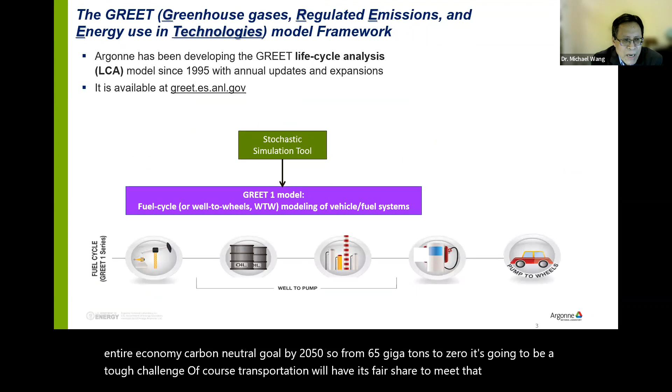So from 6.5 gigatons to zero, it's going to be a tough challenge. Of course, transportation will have its fair share to meet that challenge. Michael mentioned our efforts to develop the GREET model. In fact, we released the first GREET version in 1995. Since then, we have annual updates and expansion. The model is available at the GREET website.

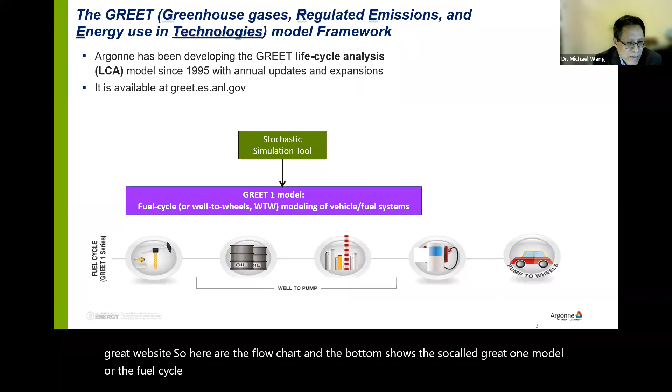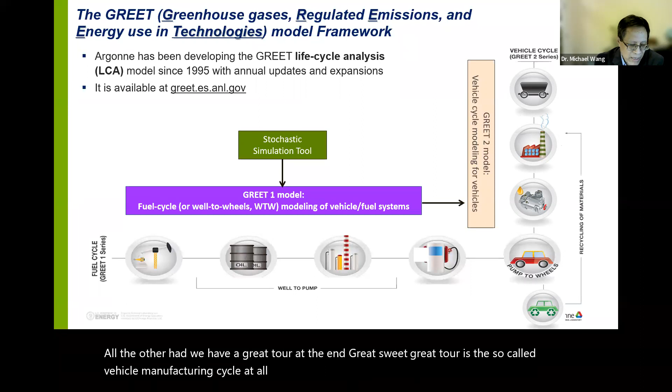So here, the flow chart at the bottom shows the so-called GREET 1 model, or the fuel cycle model, or sometimes you hear the WTW modeling. So this is in GREET 1. On the other hand, we have GREET 2 in the GREET suite. GREET 2 is the so-called vehicle manufacturing cycle. And I'll touch on both GREET 1 and GREET 2 this evening.

This is a chart to summarize our GREET user base. So as of now, we have over 50,000 registered users globally. And you see some major users with the company logos in the chart. And many OEMs are indeed intensive GREET users. For example, these 3 OEMs and some international OEMs use GREET.

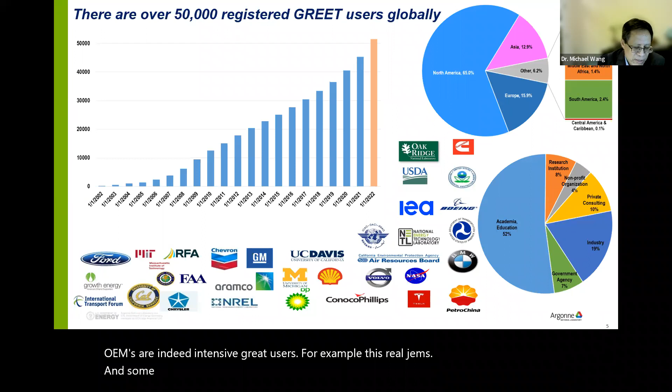The model has been used by different agencies for regulation development and for technology evaluation. For example, California Air Resources Board uses GREET for its own low carbon fuel standard compliance. EPA uses GREET for the renewable fuel standard and for tailpipe greenhouse gas emission standards. And NHTSA has used GREET for CAFE standards development.

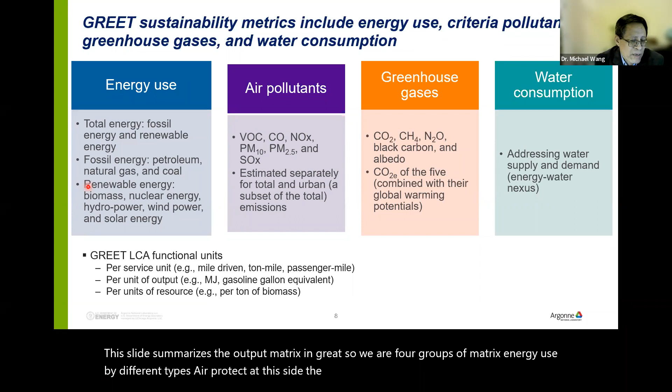This slide summarizes the output metrics in GREET. So we have 4 groups of metrics: energy use by different types; air pollutants, and these are the criteria air pollutants regulated by EPA; greenhouse gases, where we have the conventional greenhouse gases, CO2, CH4, and N2O, and we have some short-lived greenhouse gas emissions too. And finally, we have water consumption.

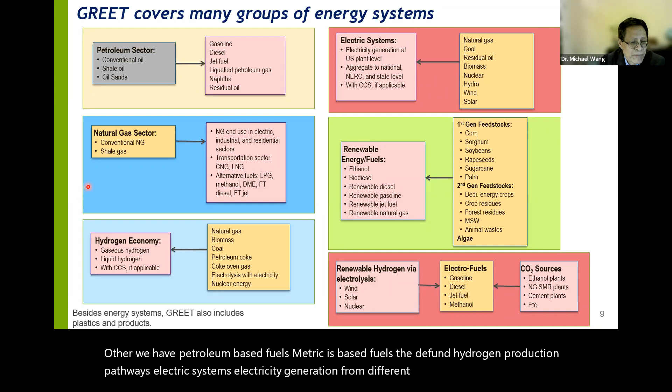This slide summarizes the so-called fuel production pathways included in GREET. So this is what's covered in the GREET 1 model. And we have petroleum-based fuels, natural gas-based fuels, different hydrogen production pathways, electric systems, electricity generation from different fuels and power plant types. And we cover biofuels and renewable fuels extensively with different feedstocks and different conversion technologies.

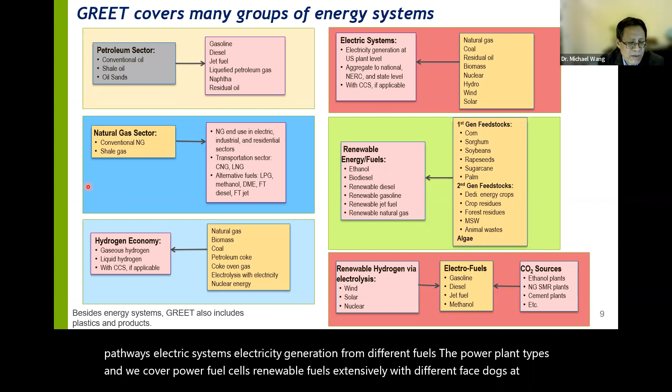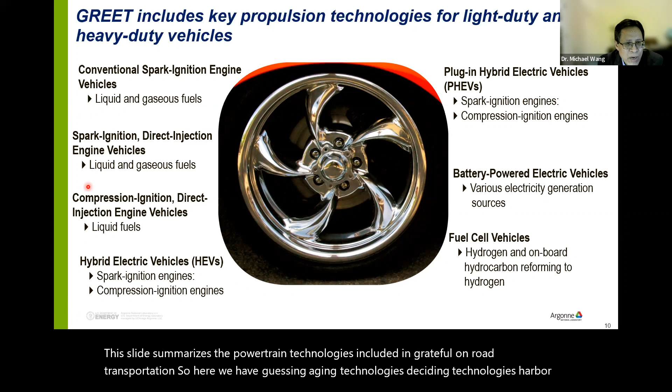And in the last 2 years, we added the so-called electrofuels, which are fuels produced from CO2 sources with renewable hydrogen from renewable power. This slide summarizes the powertrain technologies included in GREET for on-road transportation. So here we have gasoline engine technologies, diesel engine technologies, hybrid electric vehicles, plug-in hybrid electric vehicles, battery EVs, and fuel cell vehicles.

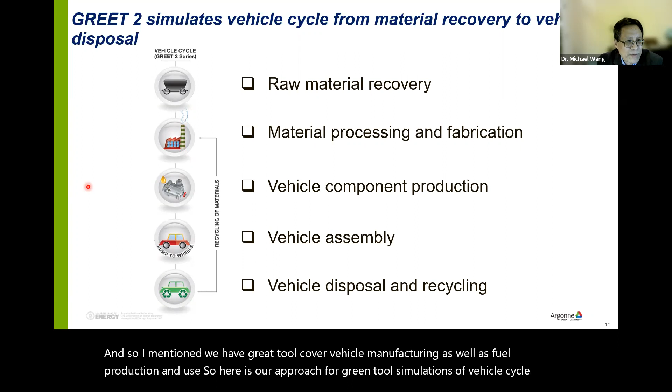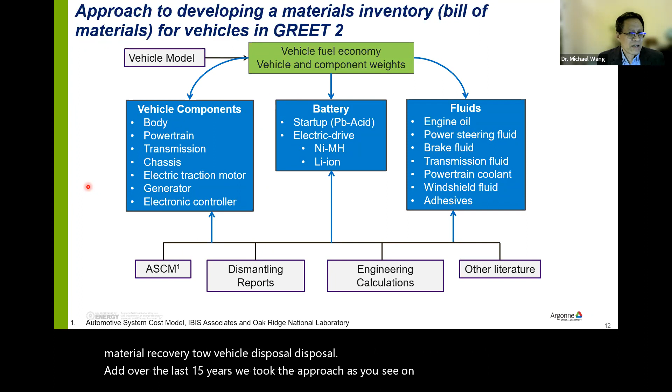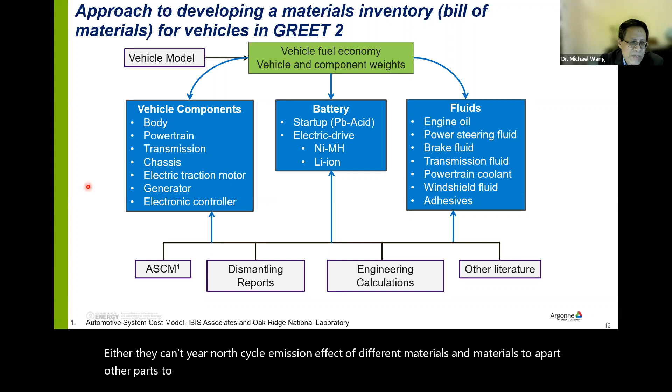And so I mentioned we have a GREET tool to cover vehicle manufacturing as well as fuel production and use. So here is our approach for GREET simulations of the vehicle cycle, from material recovery to vehicle disposal. Over the last 15 years, we took the approach you see on this slide. Basically, we break the whole vehicle into the major vehicle components, such as body, powertrain, transmission, and so on. Then we get the material composition of each component. And then we look at the life cycle emission effect of different materials, materials to parts, and parts to vehicles. So this is our GREET approach.

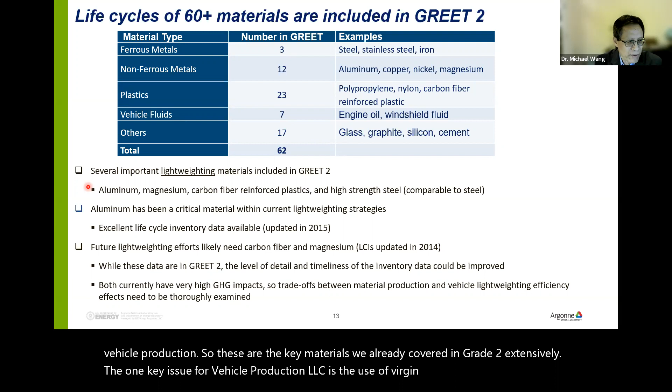And so far, we covered over 60 materials for vehicle production. We have steel, aluminum, rubber, different types of plastics, and different metals used in vehicle production. So these are the key materials we already covered in GREET 2 extensively. And one key issue for vehicle production LCA is that the use of virgin versus recycled materials can significantly affect the vehicle cycle greenhouse gas emissions, or environmental performance in general.

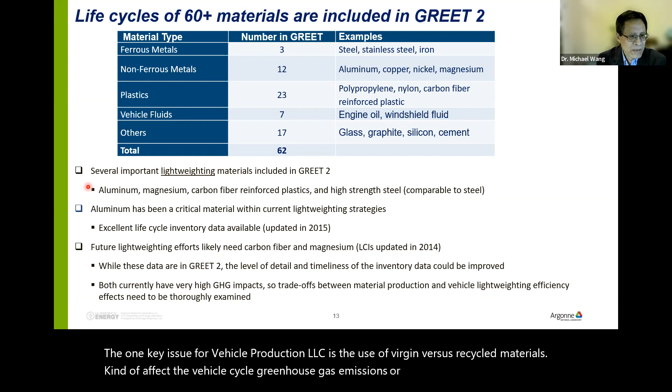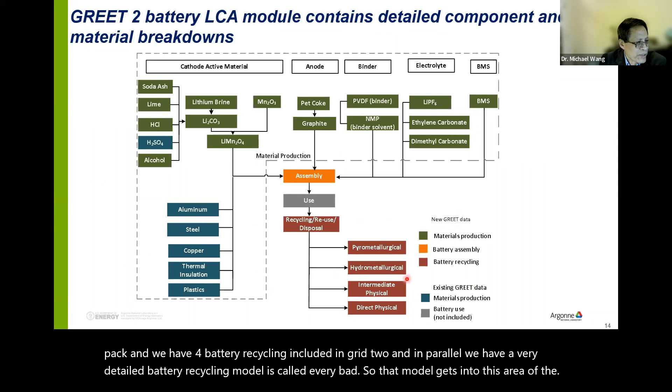And we have battery recycling included in GREET 2. And in parallel, we have a very detailed battery recycling model. It's called EverBatt. So that model gets into this area of the battery LCA significantly.

So for baseline technologies and systems, we rely on several government agencies' databases, such as those from Energy Information Administration, from EPA, and from USGS, and of course, some USDA databases for biofuels.

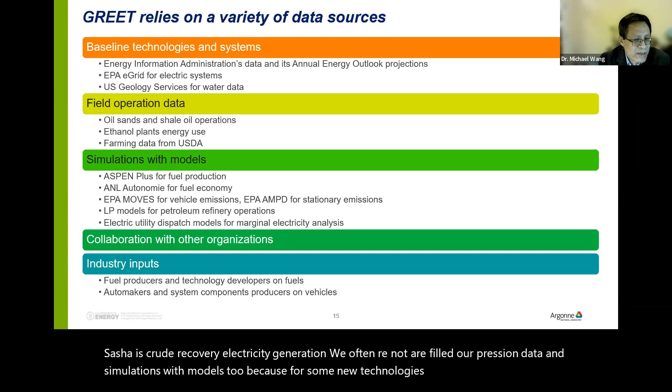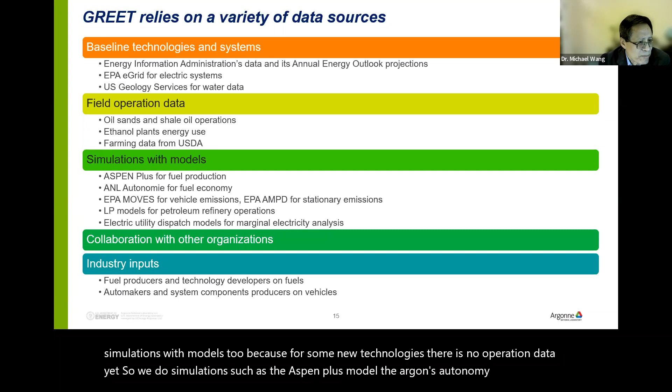And for the specific technologies we evaluate, such as crude recovery, electricity generation, we often rely on field operation data and simulations with models too, because for some new technologies, there is no operation data yet. So we do simulations such as the Aspen Plus model, Argonne's Autonomie model, EPA's MOVES model to generate the needed energy use and emissions for the activities in GREET.

And we have had a lot of collaborations with other organizations and with companies. So these are significant data sources for GREET too. And so now I take you one step further. So what do we include in life cycle analysis?

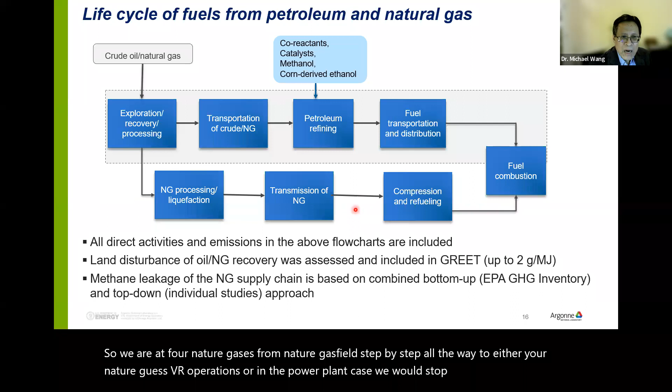So this flowchart shows you the system boundary of LCA for crude and natural gas-based fuel cycles. So in this case, crude from oil field all the way to fuel combustion and vehicle. But for natural gas, it is from natural gas field step by step all the way to either natural gas vehicle operations, or in the power plant case, we would stop here for power generation in natural gas-fired power plant.

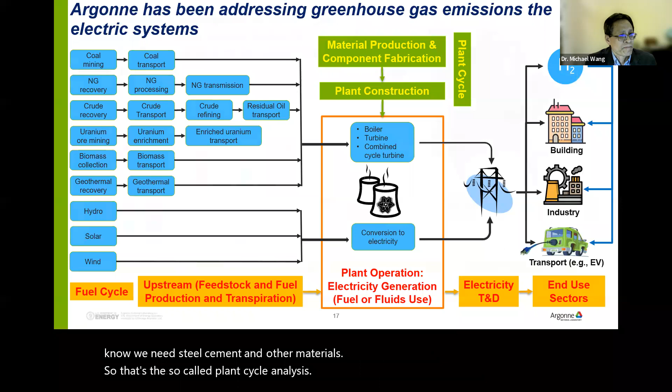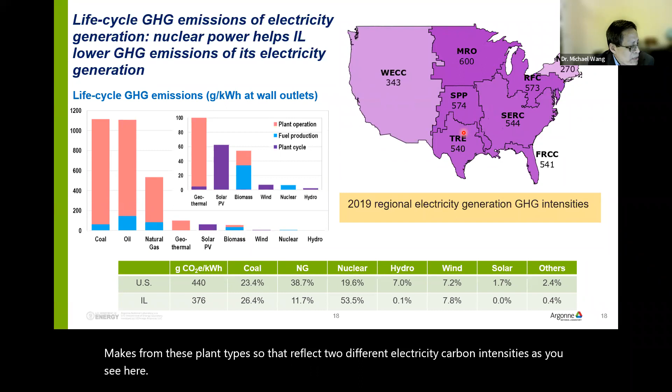And furthermore, if we look at Illinois versus US, we see the Illinois electricity has somewhat lower carbon intensity than the US average electricity. That's because we have a significantly large nuclear power share in our generation mix. As you can see, the nuclear power carbon intensity is very low, and we do include uranium enrichment, transportation, and those upstream stages.

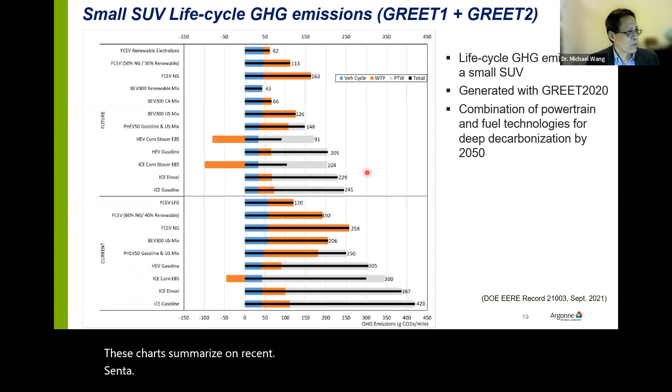These charts summarize a recent publication we developed for the Department of Energy in the so-called DOE EERE record. So here, we have the so-called current and future scenarios. Current is around 2020, future is around 2040 to 2050. As we all know, the technologies will advance over time, and our whole economy will go through decarbonization. And so those effects reflect from the current greenhouse gas emission performance to the future greenhouse gas emission performance.

And then within each time frame, if you look at here, we have different powertrain systems: gasoline vehicle, diesel vehicle, hybrid electric vehicles, plug-in hybrid, battery electric vehicles with 300-mile electric range, fuel cell vehicles with conventional hydrogen production or renewable hydrogen production.

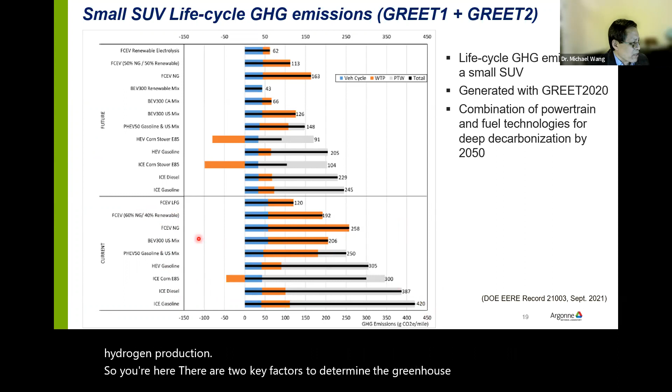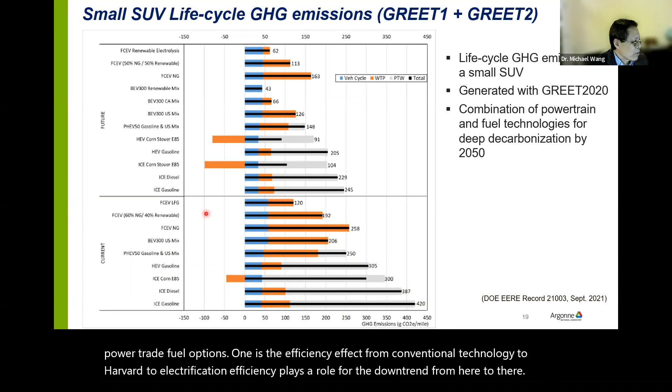So here, there are two key factors to determine the greenhouse gas emissions of these powertrain fuel options. One is the efficiency effect. From conventional technology to hybrid to electrification, efficiency plays a role for the downtrend from here to there. But also, if we look at a specific powertrain technology, the way to produce fuel plays an important role too. So here, hydrogen from different sources can have significant effect on the LCA result of greenhouse gas emissions.

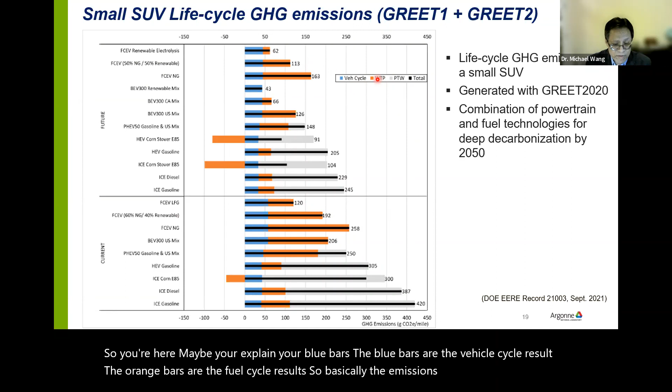So here, let me explain the blue bars. The blue bars are the vehicle cycle result. The orange bars are the fuel cycle results, so basically the emissions associated with the fuel production. This is the vehicle production. The gray bars are the vehicle operation-related emissions. So for electric cars, we know there are no emissions from vehicle operation. So your blue bars are vehicle cycle result.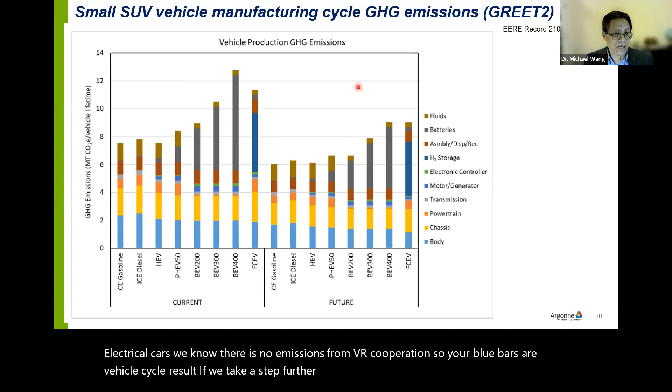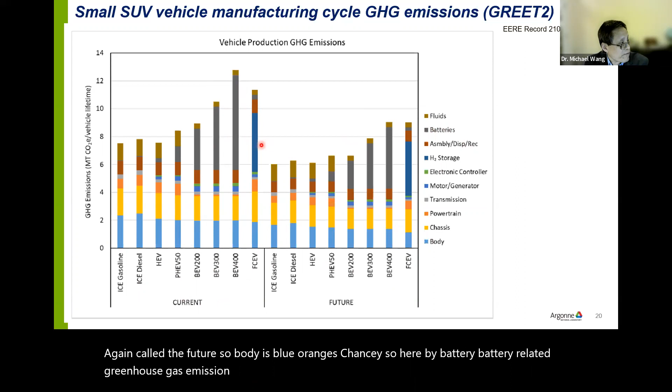If we take a step further on the vehicle cycle result, let's see where the emissions are from for the vehicle cycle result. So here, body, this is the car itself for different powertrain systems, as you see here. Again, current and future. So body is blue, orange is chassis. So here, battery-related greenhouse gas emission contributions here. The fuel cell and hydrogen storage tank contribution is here.

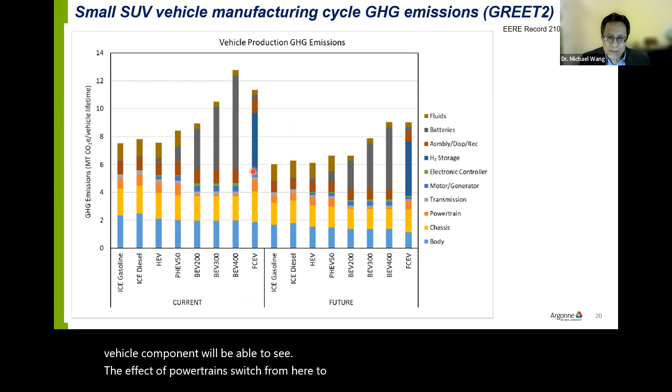So now when we break down the vehicle cycle results to different vehicle components, we'll be able to see the effect of powertrain switch from here to there. Where do we see the switch in greenhouse gas emission burdens for a whole car? So that's what we can generate from GREET simulations. So yeah, those are some results for the US.

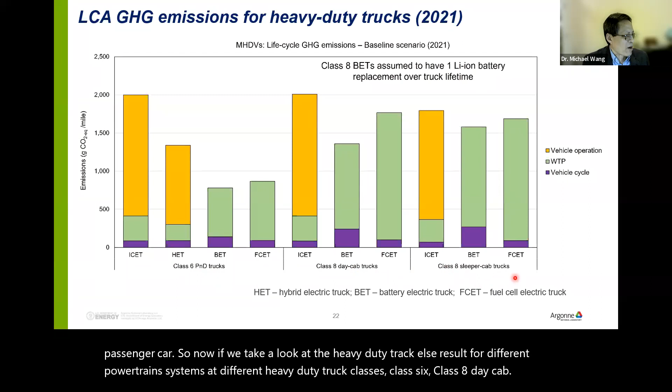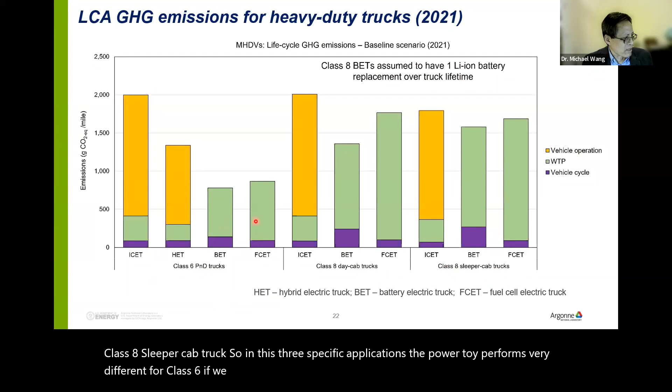So that's the result for passenger cars and SUVs. The US result was for SUV, the global result was for passenger car. So now if we take a look at the heavy-duty truck LCA result for different powertrain systems and different heavy-duty truck classes, Class 6, Class 8 day cab, Class 8 sleeper cab truck. In these three specific applications, the powertrain performance is very different. For Class 6, if we electrify, we see significant greenhouse gas reductions. But for Class 8, the benefit is not that significant relative to the diesel trucks.

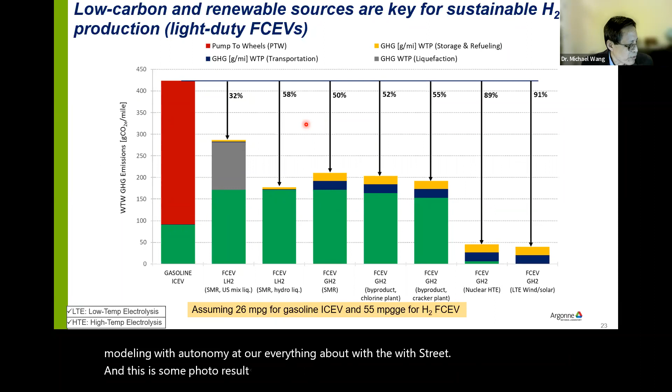So that's a key factor we found out through our very detailed vehicle modeling with Autonomie and our LCA modeling with GREET. And this is some further result for hydrogen fuel cell. So as I mentioned, for hydrogen fuel cell, the way to produce hydrogen has significant effect. So this is the liquid hydrogen from natural gas steam methane reforming. This is how we see hydrogen produced now.

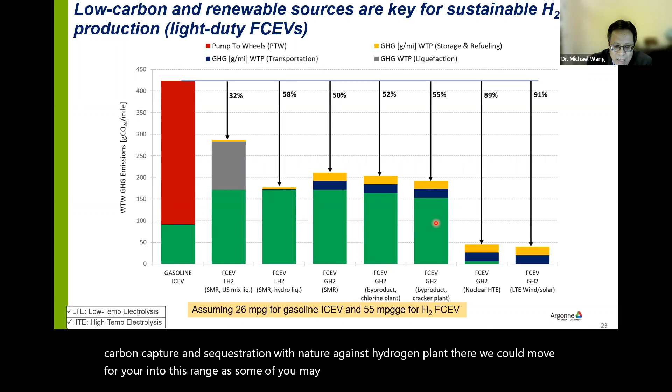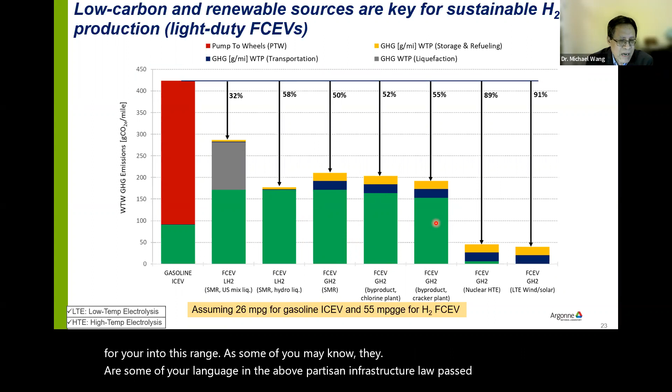But if we can move to the so-called green hydrogen production, in this case hydrogen from renewable power, we have significant reductions. Or if we have the so-called blue hydrogen, that's carbon capture and sequestration with a natural gas hydrogen plant, then we could move into this range. As some of you may know, there is some language in the bipartisan infrastructure law passed last summer. There are some specific hydrogen greenhouse gas standards proposed in the law. And at this moment, DOE is using GREET to develop the standards for different hydrogen production pathways.

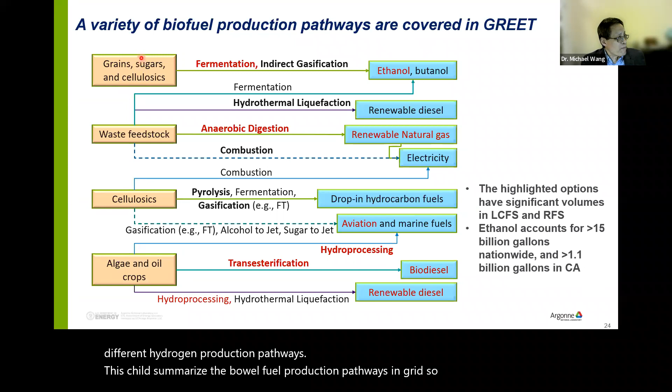This chart summarizes the biofuel production pathways in GREET. So we have many biomass feedstocks on the left, many conversion technologies in the middle, and we result in different biofuels on the right. So these are various combinations of biofuel productions. What are highlighted in red in this chart are the significant biofuel productions as we see now in the US. For example, corn ethanol, the US produces close to 16 billion gallons a year now.

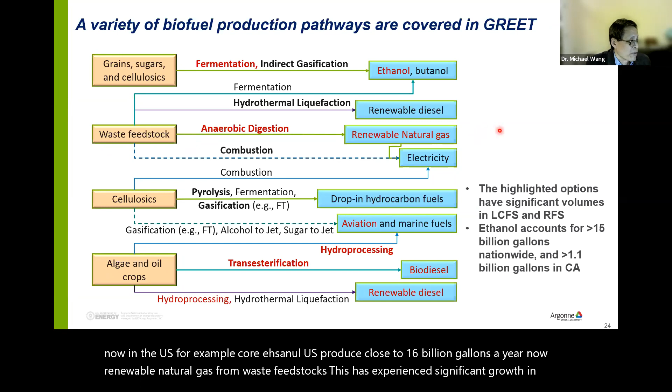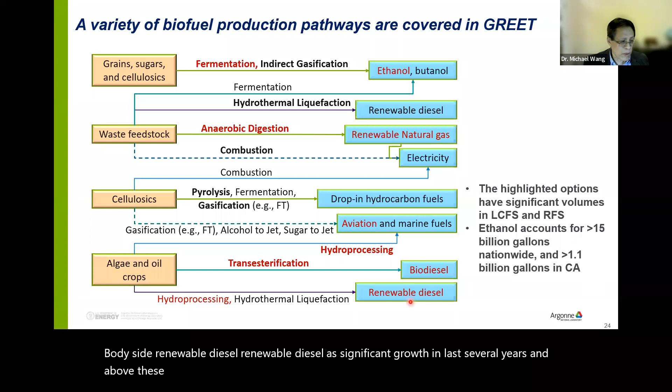Renewable natural gas from waste feedstocks has experienced significant growth in the last 5 years, both nationwide and in California. Biodiesel and renewable diesel have seen significant growth in the last several years, but biodiesel production has stabilized near 2 billion gallons a year. So these are our significant biofuel supplies now in the US.

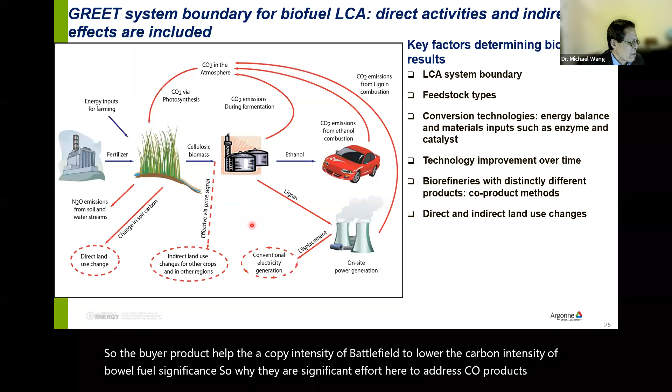Two key factors affect biofuel LCA results. First is land use change, as you see here, we include it in GREET. The other is the byproduct from a biofuel plant together with biofuels. For example, we produce animal feed in an ethanol plant, and we have soy meal from soybean together with biodiesel and renewable diesel. So the byproducts help lower the carbon intensity of biofuel significantly. While there are significant efforts here to address co-products in LCA, in the last almost 14 years, the controversial issue has been land use change, and I'll touch on that later.

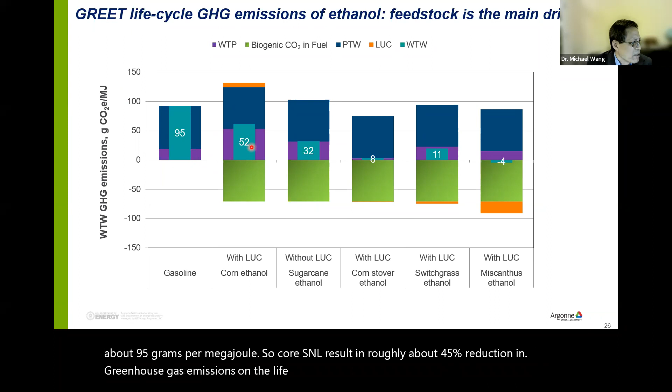Here is a high-level summary of our biofuel results. Corn ethanol, based on our most recent analysis, has a carbon intensity of 52 grams per megajoule versus our gasoline at about 95 grams per megajoule. So corn ethanol results in roughly about 45% reduction in greenhouse gas emissions on a life cycle basis. If we move to so-called second generation biofuels, as we see in the last three bars here, we have much lower carbon intensity for ethanol.

Some facts for Illinois: we are number 3 in the nation for biofuel production. The number 1 state is Argonne... actually Iowa, and number 2 is Nebraska. So we are a significant biofuel producing state. As I mentioned, we conclude that corn ethanol now achieves about 44% greenhouse gas reductions versus petroleum gasoline, and this is from a GREET simulation.

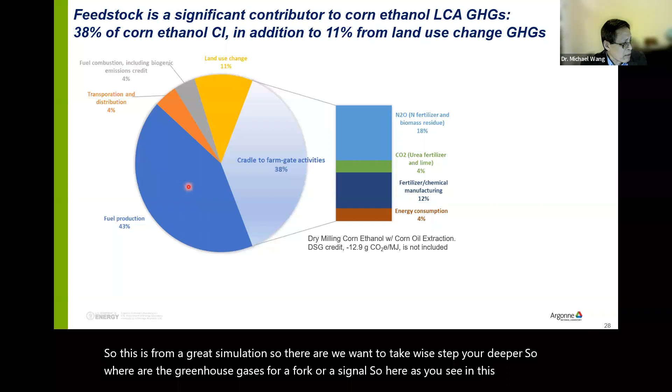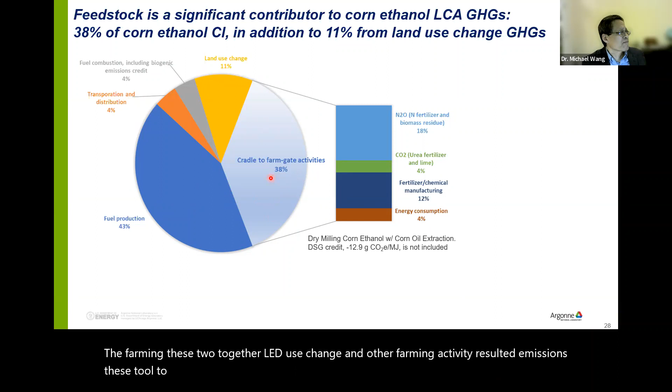Now we want to take one step deeper. Where are the greenhouse gases for corn ethanol coming from? As you see in this pie chart, the ethanol plant accounts for about 43% of the total corn ethanol greenhouse gases. The farming activities, together with land use change, account for about half of the corn ethanol greenhouse gas emissions. So feedstock is a significant stage for our corn ethanol carbon intensity.

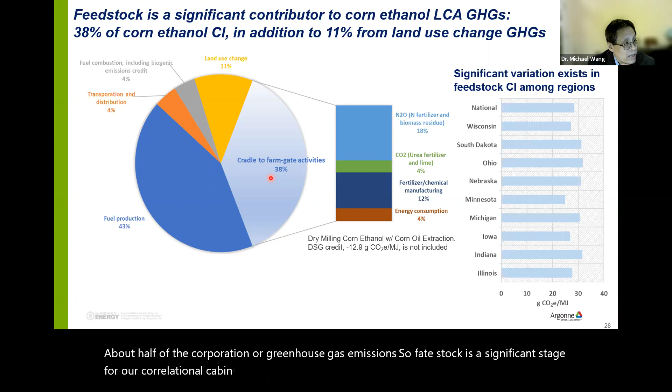If we look at Midwest states, we know the yield of corn is different in different states because of climate and soil conditions, and LCA results reflect that. So here are the major 9 corn producing states and the carbon intensity of corn fed into ethanol production.

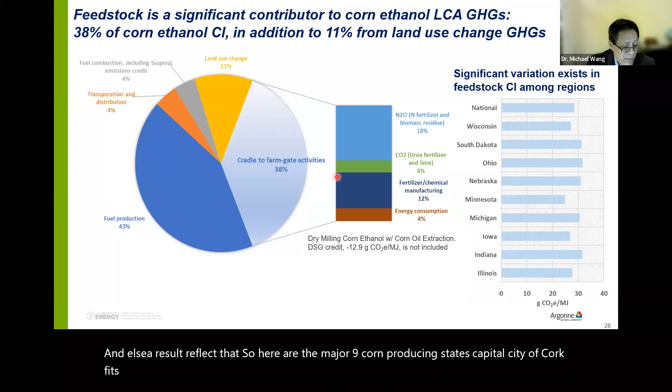So you alluded to our recent study on corn ethanol. Last year we published a paper documenting our examination of the US corn ethanol industry from 2005 all the way to 2019. 2005 is when the first Renewable Fuel Standard was put in place, and in 2010 we have RFS2 in place. So our biofuel policies have had a significant effect on biofuel volume, getting us now to close to 20 billion gallons of biofuels, with corn ethanol accounting for up to 16 billion gallons.

We wanted to see whether there's a trend in the carbon intensity of corn ethanol. So we used USDA statistical data for farming and industry surveys for corn ethanol plant performance over 15 years. We conclude that corn ethanol CIs have decreased over the last 15 years by 23%, from two sources: the corn ethanol plant CI reduction shows about 30% - the plant itself reduced its carbon intensity by 30% - and the corn farms have reduced carbon intensity by 15%. Together these make the industry reduce its carbon intensity by 23%. That's why we now show corn ethanol in 2019 reduced greenhouse gas emissions roughly by 45% relative to petroleum gasoline.

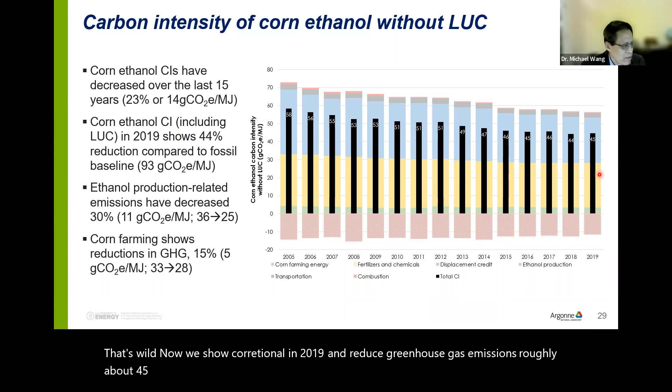And many of us know where they are. Some transportation sectors are hard to electrify - the so-called hard-to-electrify subsectors, including aviation, long-haul trucks, and ocean-going vessels. These are the sectors that will be hard to electrify, so liquid fuels are uniquely positioned to continue being the energy source for those sectors. So how are we going to decarbonize those subsectors?

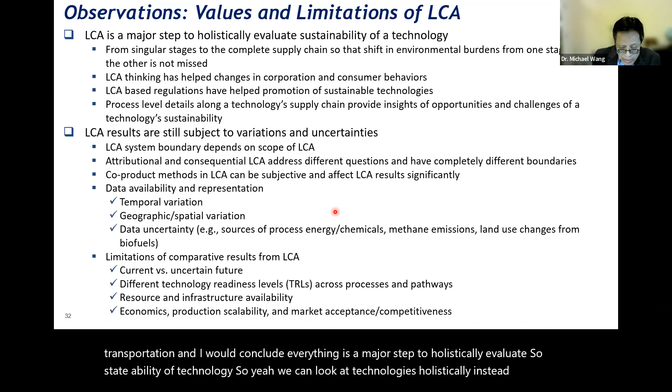I would conclude LCA is a major step to holistically evaluate the sustainability of technology. So we can look at technologies holistically instead of, back many years ago, only looking at tailpipe emissions for vehicles. Now we look at the whole fuel cycle, the vehicle cycle, and vehicle operation.

The LCA thinking has helped change corporate and consumer behaviors. Corporations now have to disclose the so-called scope 1 to 3 emissions, which are supply chain emissions, or in different terms, LCA emissions. LCA-based regulations have helped promote sustainable technologies.

We see that for biofuels from our retrospective analysis of US corn ethanol. The process level details give us insight into the opportunities and challenges of technology sustainability. But LCA results are still subject to variations and uncertainties.

System boundaries depend on the scope of LCA. You saw our system boundaries for petroleum fuels, natural gas fuels, electricity, and biofuels. And even though we think our system boundary is comprehensive, there are still people asking us to expand the system boundaries for LCA. I mentioned the co-product effect results significantly matter, and data availability and representativeness is a key issue for LCA results.

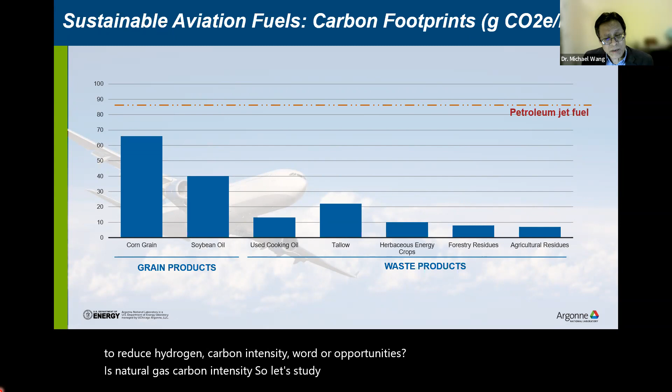And for GEVO, what we did was look at the first part, corn grain-based isobutanol, and isobutanol to jet fuel. So what we did was look at their technology and where the opportunities are, where hydrogen is used, where natural gas is used, what are the opportunities to reduce hydrogen carbon intensity, where there are opportunities to reduce natural gas carbon intensity. That's a study we did last year. We had a draft paper submitted to a journal, and it's currently under review.

Okay, thank you. Anyone else have any other questions here?

I had a question, Mike. For those who didn't see the note we put in the chat, if you have questions, please put them in the chat and we'll moderate them. Michael, when we had another group from the Iowa Corn Growers Association, they presented that ethanol can actually be carbon neutral because when they grow the corn, it pulls CO2 out of the air. Did you factor in the CO2 absorbed in the growing process into the cradle to farm gate activities?

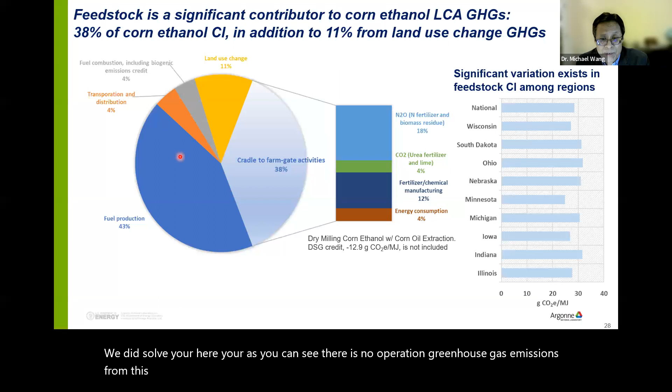Yeah, we did. As you can see, there are no vehicle operation greenhouse gas emissions from this part for ethanol. That's because the carbon in ethanol is carbon from the air, the so-called carbon neutrality approach. So that's built in.

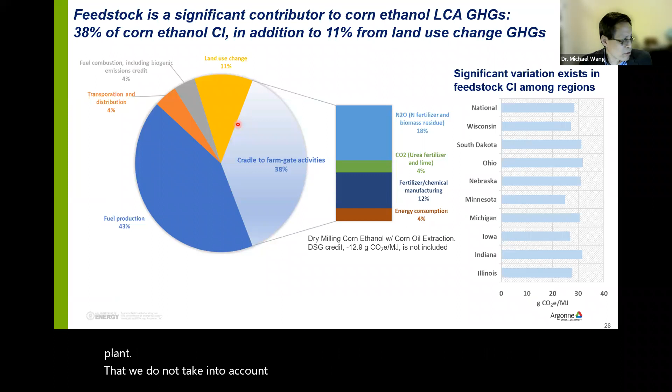The corn ethanol plant fermentation process produces significant CO2 emissions, as we know, because beer distillation produces CO2 just like ethanol plants. We do not take into account the fermentation CO2 in this part, because that CO2 is from the CO2 in the air during the corn plant's growth. So that's carbon neutrality, and even with that, we still see significant greenhouse gas emissions.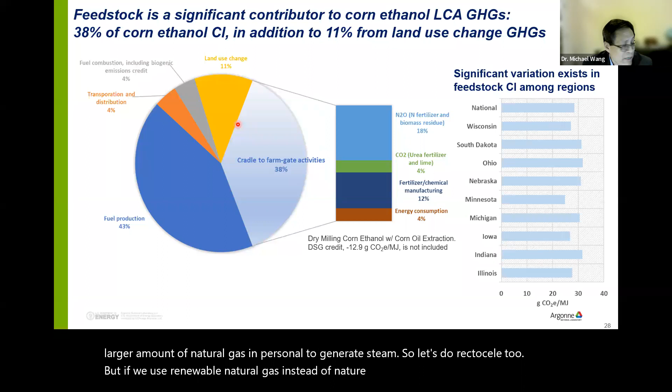Why? Because we use a larger amount of natural gas in ethanol plants to generate steam, so that's direct CO2. But if we use renewable natural gas instead of fossil natural gas, we can remove a large amount of the ethanol plant's CO2.

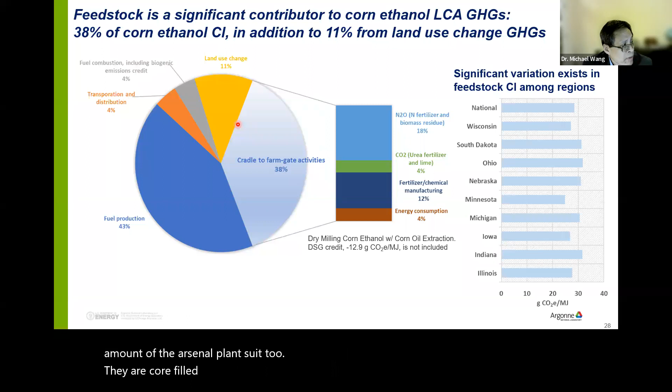The cornfield emissions—there is some data showing that soil organic carbon content has increased over the last 30 to 40 years in corn farms. So there's long-term soil organic carbon data showing increased soil carbon content. That's in a way carbon sequestration from the air to plant roots, and it adds up in the soil.

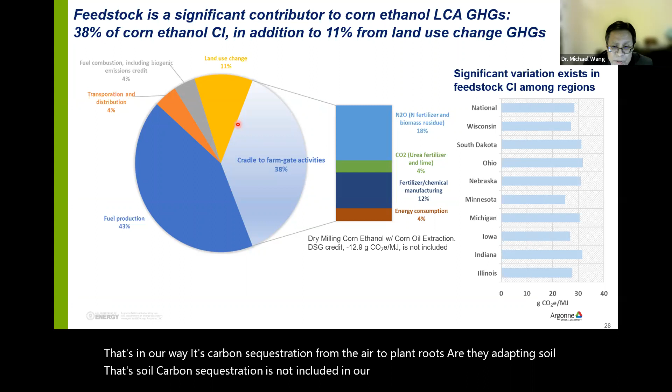That soil carbon sequestration is not included in our analysis, because we're still doing a lot of analysis to see whether we have reliable data on SOC. Plus, EPA and California do not take into account SOC changes, so because of that, we do not take it into account.

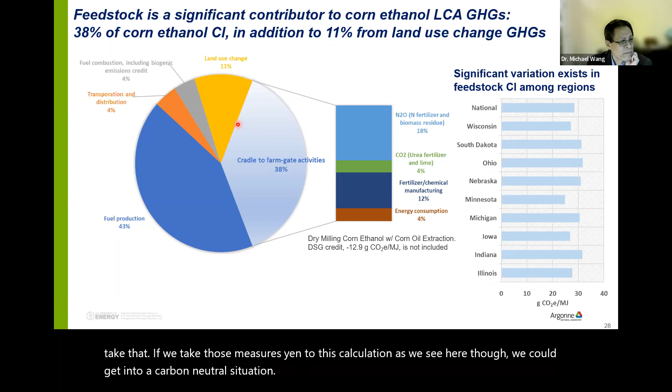If we take those measures into this calculation, as we see here, then we could get into a carbon neutral situation. Okay, very good. Well, I've just opened the mic to Mr. Phil Fair. Phil, go ahead and ask your question.

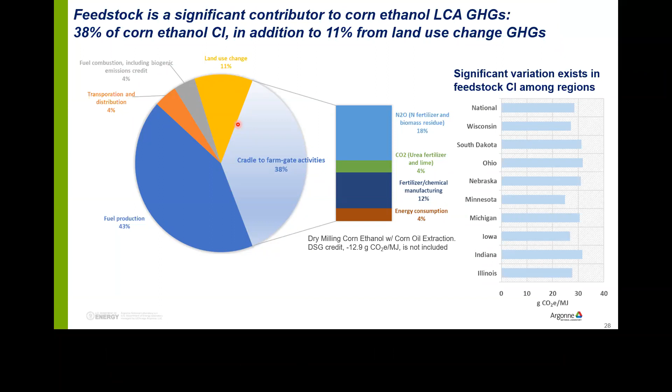Well, these are your long-haul Class 8 trucks, and we know under freeway driving, diesel trucks are somewhat efficient. On the other hand, battery electric trucks and fuel cell trucks, under those operating conditions, have relative efficiencies better than diesel trucks, but not by a huge margin. So that's reflected here. Whether automation will help these two technologies over diesel trucks, I do not know—I think maybe the technology could help all three together.

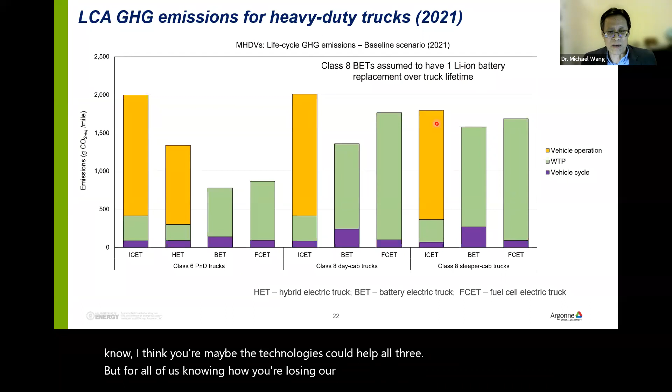But as we all know how those long-haul trucks operate, especially when you carry a large battery pack, the battery electric trucks—that penalizes your efficiency.

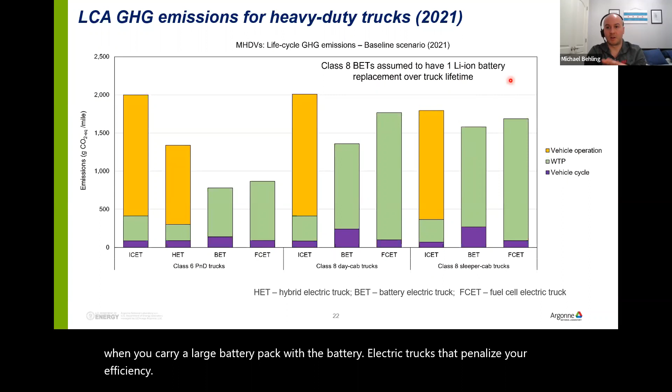Yeah, just from my point of view, I'm from Navistar, so in the heavy truck industry. Not talking about any technology specifically, but Phil, maybe some of that could happen with lowering the speeds. Right now truckers are driving 70, 75 miles per hour sometimes, and obviously aerodynamics comes into play there. The slower you can bump that down, the more fuel efficient trucks are, and even if it's not fuel, if it's battery, they're more battery efficient as well. So you'll find big gains there, but that's going to be across the board just because of aerodynamics.

So hopefully that helps. Yeah, I agree—the aerodynamics definitely help trucks when we slow down a little bit from 65 or 70 miles an hour to some lower speed, maybe around 50 to 55 miles an hour.

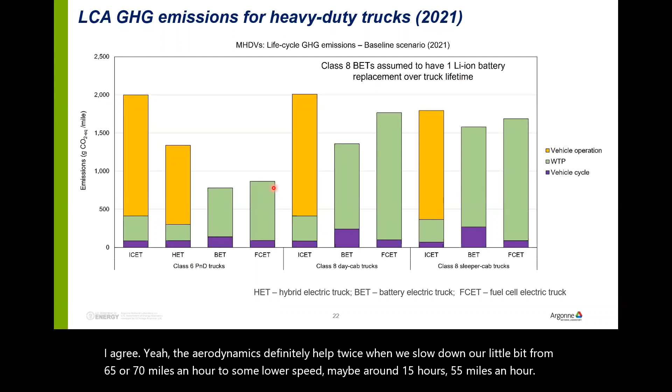Yeah, Dr. Wang, I want to hear your response on the latest publication in the National Academy of Sciences from a study by the University of Wisconsin on corn ethanol, claiming it actually has greenhouse gas emissions 20% higher than gasoline. Yeah, so that paper is the last one of this bar.

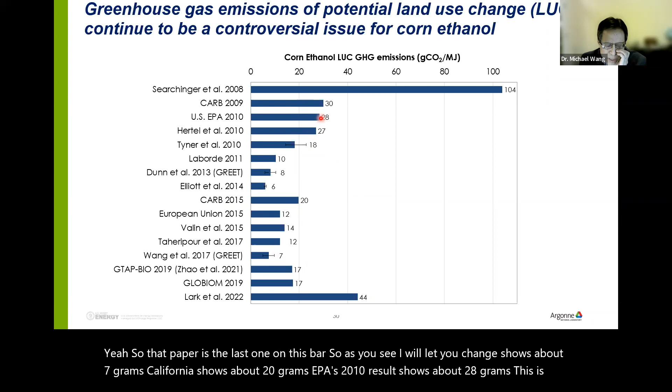So as you see, our land use change shows about 7 grams. California shows about 20 grams. EPA's 2010 result shows about 28 grams. This is the land use change emissions only. So if we add what they have here, you remember I said our conclusion is corn ethanol now is about 45 or 52 grams, including our 7 grams.

So 52 grams and another 37, right? 37 grams to 52 gets us pretty close to the 95 grams of petroleum gasoline. So even with large land use numbers, they conclude break even, not increase. But if they add their number from EPA's number, then their overall LCA result will go above 95 grams.

Okay, thank you very much. I think this reflects that you understand the assumptions embedded in that study as well. So I appreciate your direct response to that question.

And I have one more question. Some organizations say that with renewable natural gas, if you capture methane that would otherwise leak into the atmosphere and burn that in transportation applications, it would actually be climate friendly, since methane is a worse greenhouse gas than CO2, and you're reducing the impact on the climate. By burning the renewable natural gas, we can actually improve the situation. Your thoughts on that, Dr. Michael Wang? Yes, that's a good question.

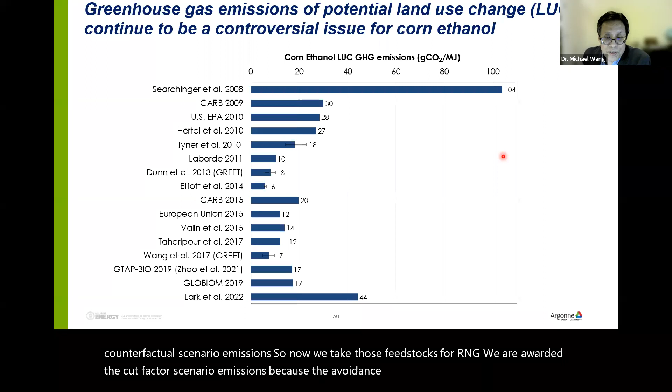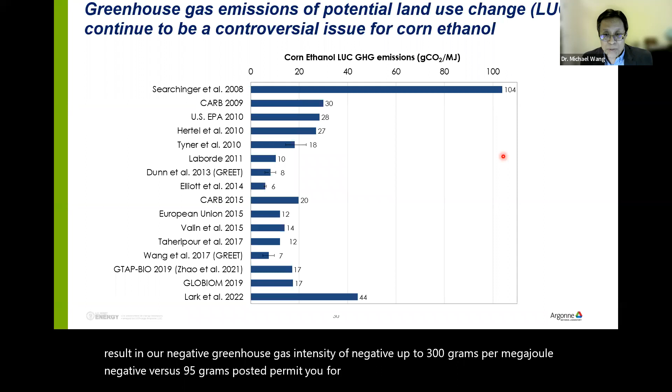Because of the avoidance of counterfactual scenario emissions for each megajoule of RNG produced, in some cases we conclude from GREET that RNG can result in a negative greenhouse gas intensity of up to negative 300 grams per megajoule, versus 95 grams positive per megajoule for gasoline. So if you subtract those two, suddenly you have a credit close to 400 grams per megajoule by switching from gasoline to RNG. In California under LCFS, each ton of CO2 is worth about $200.

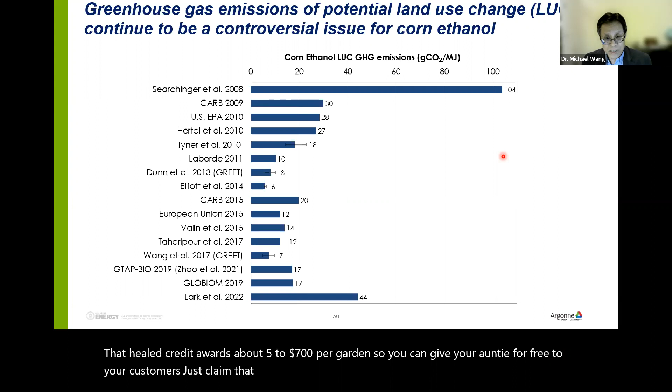So now with 400 grams per megajoule, if you sell a gasoline equivalent gallon of RNG in the California market, that huge credit is worth about $5 to $7 per gallon. So you can give your RNG for free to your customers, just claim that carbon credit, and still come out with a big win. So that's how significant the credit is. And that's the driver for the significant growth in RNG in the last 5 years.

No, that was some of the stuff that the ethanol guys had mentioned. So thanks for putting that into perspective, because they just touched on it. So very helpful.